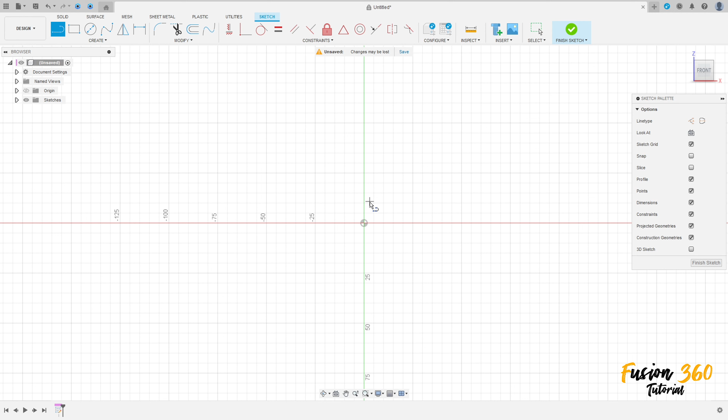Go to create a sketch, select the front plane, select line, click here in the midpoint, make a line here with 200 millimeters. Okay, select, make a line here with 10 millimeters, 80 millimeters here, 10 millimeters, and 120 millimeters here. Okay, we have this sketch here.

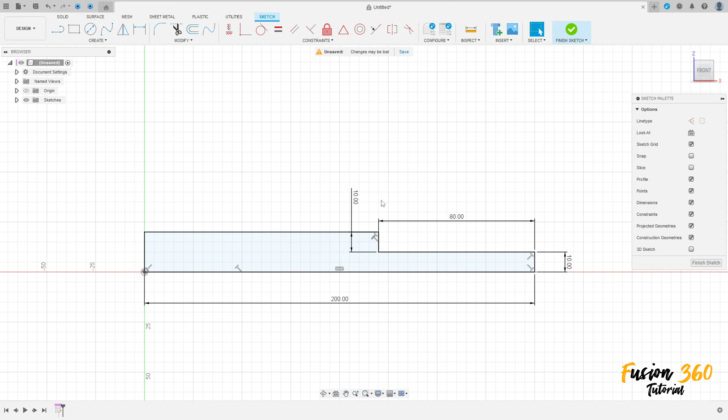Okay, finish the sketch, go to extrude. The direction here is symmetric, measurement whole length, and the distance here 100 millimeters. Operation new body, press OK. We have this.

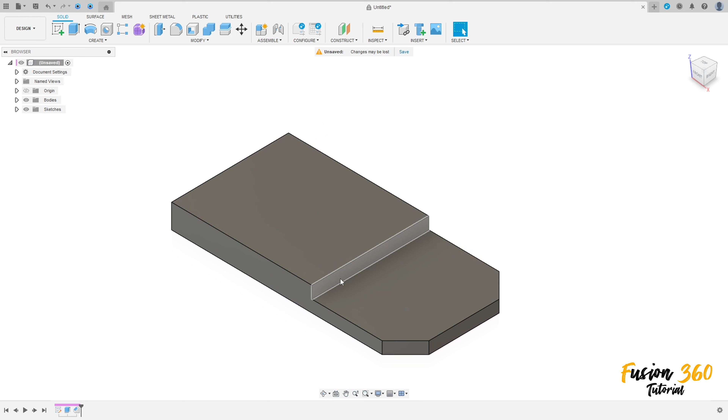Now go to modify, select the chamfer, select this edge here and this edge here. The chamfer here is 20 millimeters, equal distance. Press OK. We have this. OK. Now go to create a sketch, select this face here,

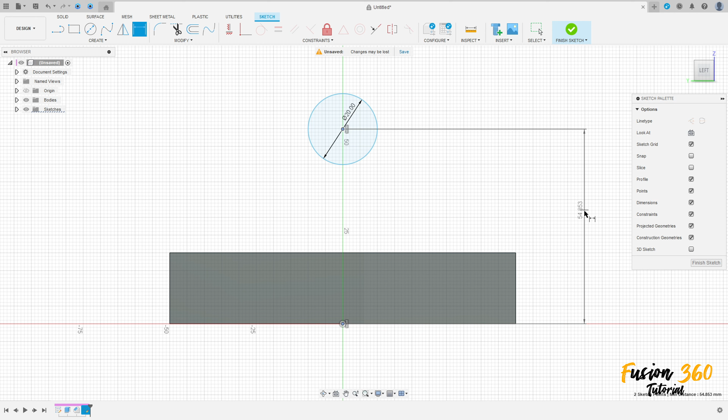and select a circle. Make a circle here with 20 millimeters of diameter. Go to constraint, select horizontal vertical, click here in the midpoint here and the midpoint here. Go to sketch dimension. The distance here is 60 millimeters. Okay. Now select a line.

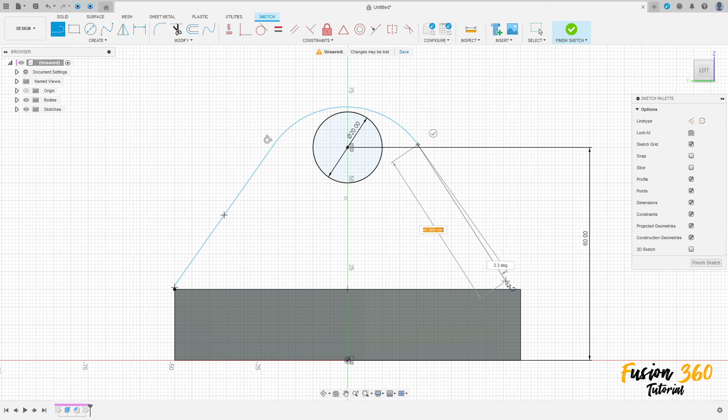Make a line here. Create an arc here. And create another line here. Okay. Go to coincident. Select this point here and the center here. Okay. Go to constraint, select equal. Make this line equal this line.

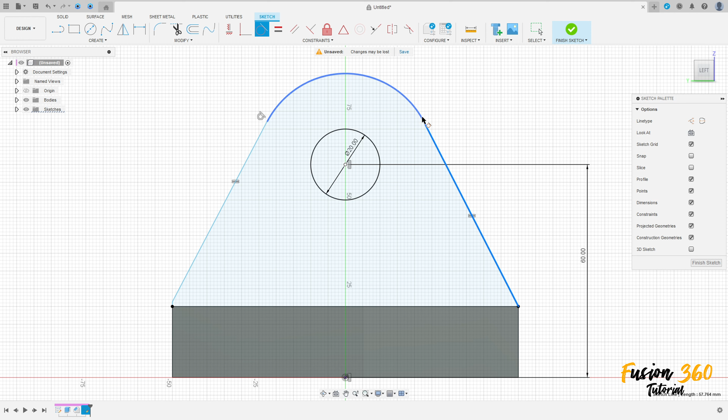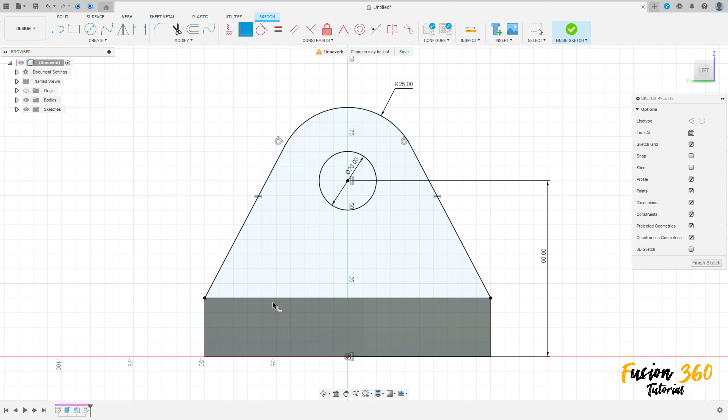Okay. Go to constraint, select tangent. Make this line tangent with this arc. Okay. Now go to sketch dimension. The radius here is 25 millimeters. Okay. Let me see why this is blue. Oh, we made the two lines here, sorry. Make this point coincident here. Okay. We have this. Finish the sketch.

Go to extrude, select this profile here. Extrude this to this side here. 20 millimeters, minus 20 millimeters, operation join, and press OK. We have this. Okay.

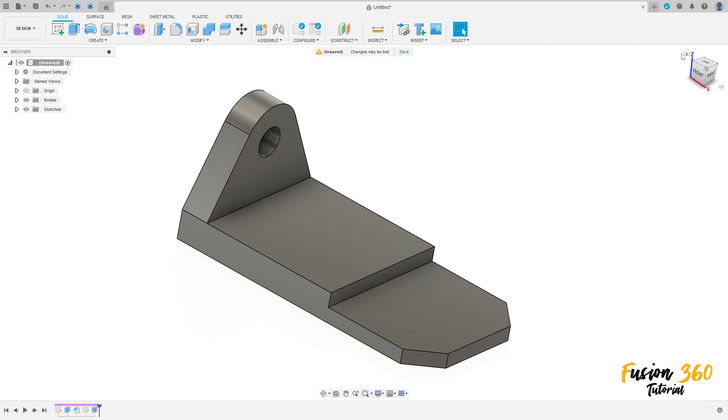Now go to create a sketch, select this face here, select this circle, make a circle here with 10 millimeters of diameter. Okay. Go to sketch dimension. The distance between this circle and this edge here is 20 millimeters. And the distance to this circle here and this edge here is 25 millimeters.

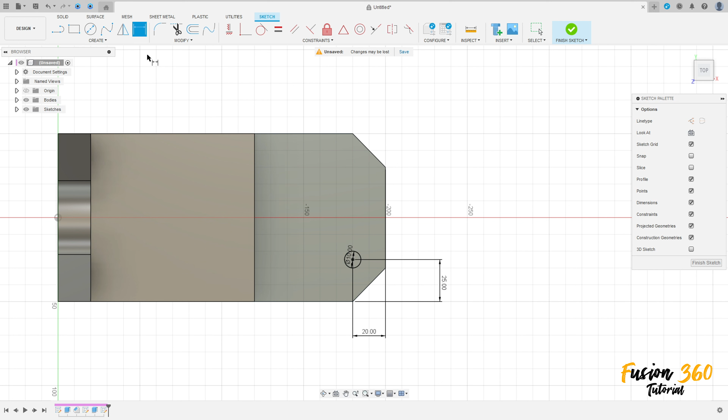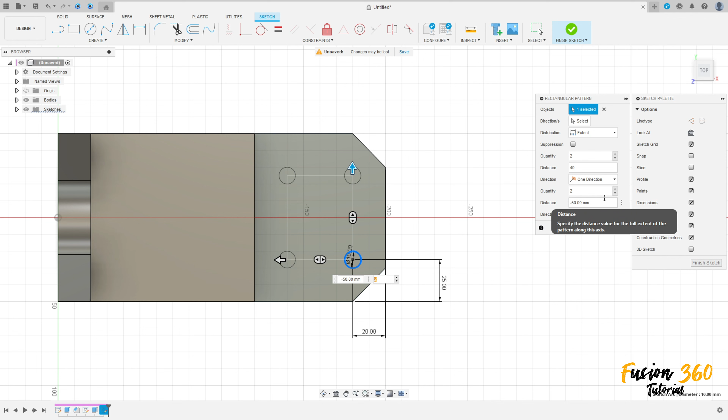Okay. Go to create, select the rectangular pattern, select this circle here, the drive direction. Quantity here is 2. And this quantity here is 2. The distance here is 40 millimeters. Okay. And the distance here is 50 millimeters, minus 50 millimeters. Press OK. We have this. Okay.

Finish the sketch. Go to extrude. Select this profile here, the 4 circles here. The operation here is cut. The extent type all. Make sure that the direction of this cut is to this direction and press OK.

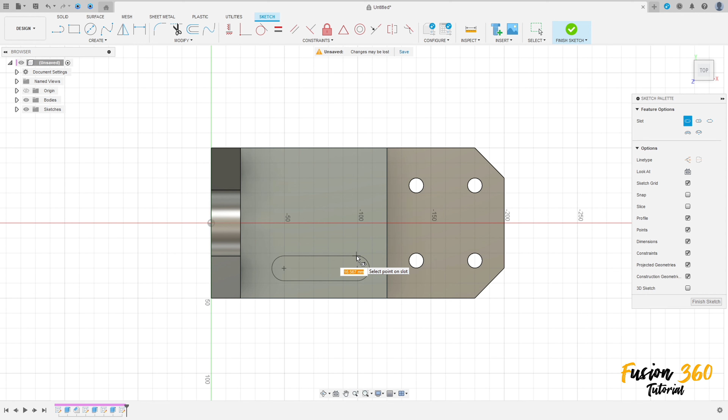Now go to create a sketch, select this face here. Go to create, select slot, center to center slot. Make a slot here with 50 millimeters of distance here. And the radius here is 12 millimeters. Or 12 millimeters of diameter, 6 millimeters of radius, okay?

Go to sketch dimension, the distance here 50 millimeters. The distance between the center of this slot and this edge here is 20 millimeters. And the distance of this point here and this edge here is 50 millimeters.

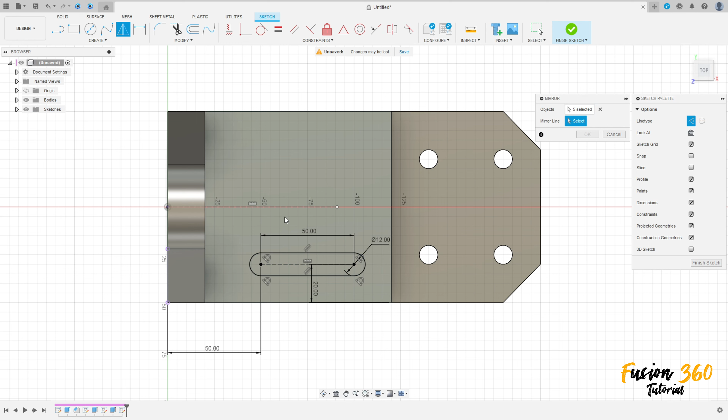Okay. Select line, construction line, click here in the midpoint, make a construction line here, and go to mirror, select this slot here. The mirror line is this construction line, press OK. We have this, okay? Finish the sketch.

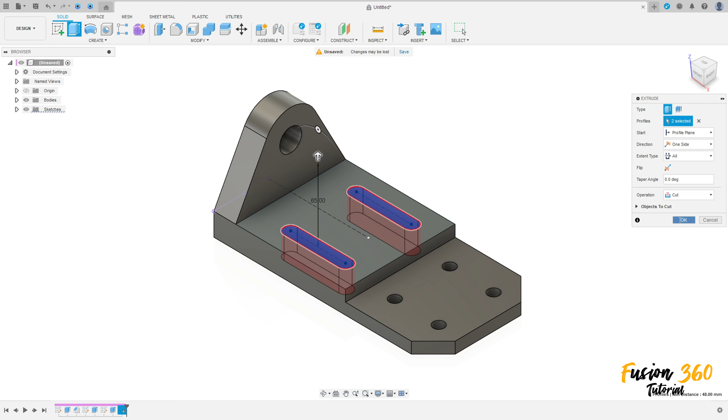Go to extrude, select the two profiles here, and make a cut here. Operation cut, extent type all, and press OK. We made this, okay? Here we finish our exercise.